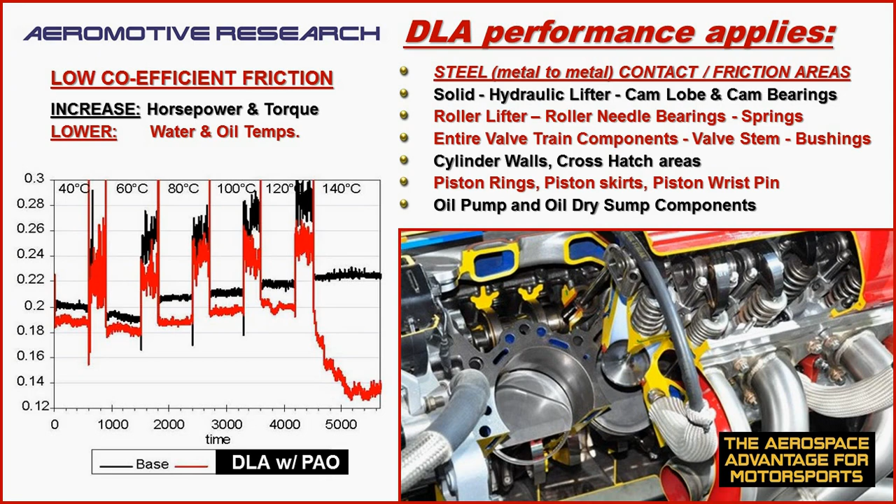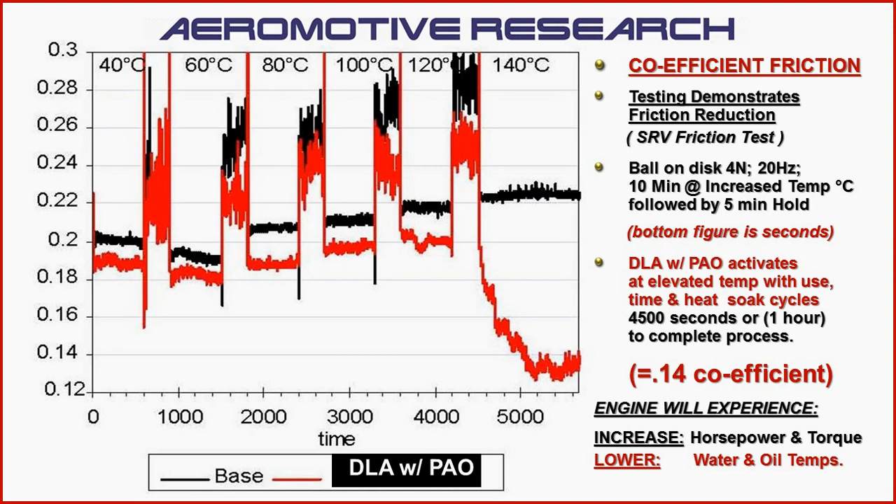Protecting the valve trains and components, the pistons, the rings, and the oil pump. It will help reduce the coefficient of friction to give you a little more horsepower and torque and lower your water and oil temperatures. Even though a 20W50, it still has a lower coefficient of friction with the additive package that's in there. The engine will be protected during those cold start requirements, with increased horsepower and torque.

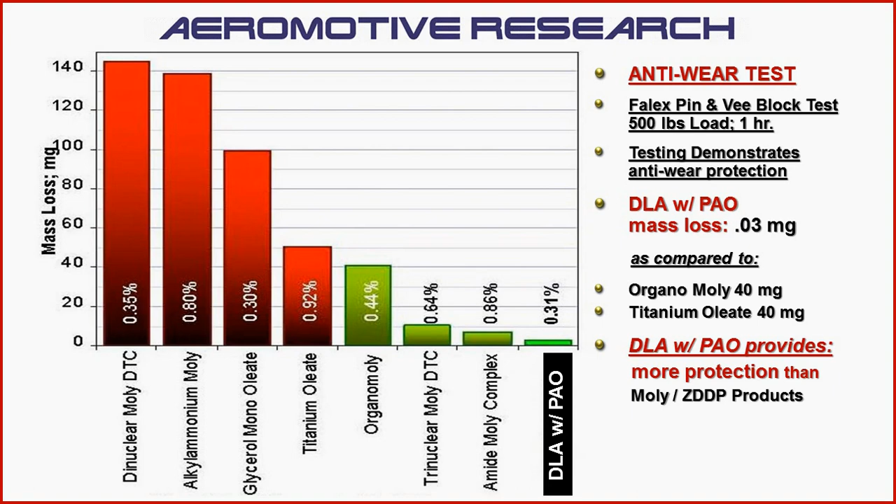Something that's very important in the 20W50 application is the anti-wear capability. The diamond-like additives with the PAO will have less loss of metal in the metal-to-metal contacts. In other words, it will perform better than products with moly in them.

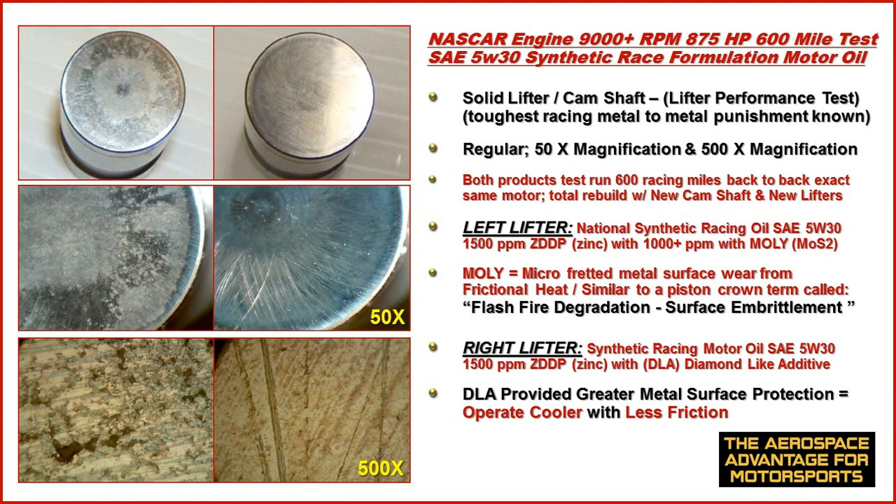Here is another showing of that lifter. You see the lifter surfaces after 600 miles and 9,000 RPMs. On the left is the high zinc motor oil with the moly, and on the right is the high zinc motor oil with the diamond-like additives.

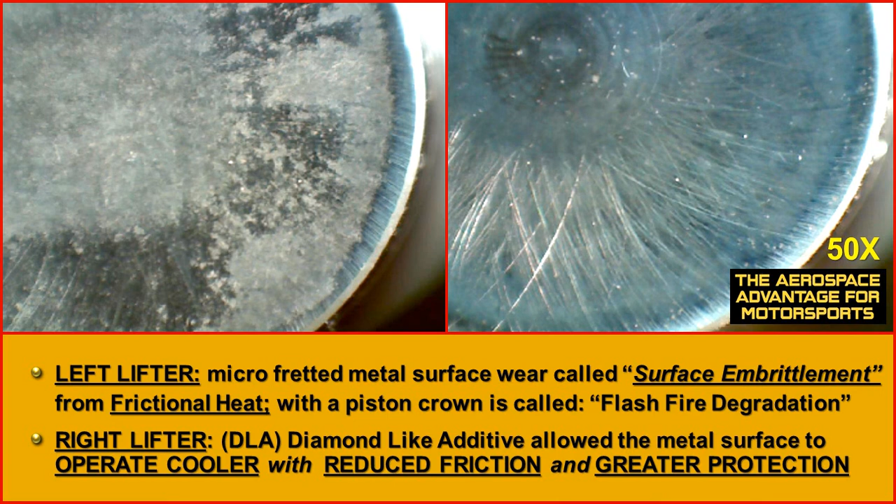On the left, at 50 times magnification, you see the micro-fretting of the metal surface. It's called surface embrittlement. Say, Clayton, that's a fancy word. I know, just reverse it. Embrittlement of the surface. In other words, from the heat and the friction, it just started breaking the metal off. If this was a piston crown, it'd be called flash fire degradation. In other words, it's degrading from the heat that's taking place.

But you see, the right lifter has the diamond-like additives. It allows the metal surface to operate cooler with reduced friction and greater protection. Now again, on a 20W50, you say, hey, it's thicker oil, it should protect. Yes, until you get to the point where the actual metal to metal is coming together and you don't have a lot of that thick oil film being a cushion. This is where the additive's nano-dimensional performance comes into the metal and works better.

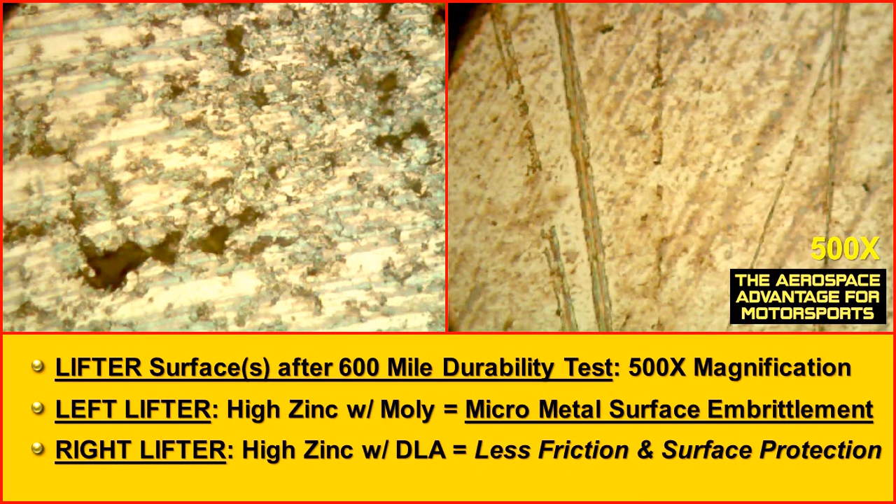At 500 times magnification, after the 600-mile durability test, the left lifter with the high zinc and the moly had micro metal surface embrittlement. The right lifter, high zinc with diamond-like additive, less friction, greater surface protection. Truly the aerospace advantage for motorsports.

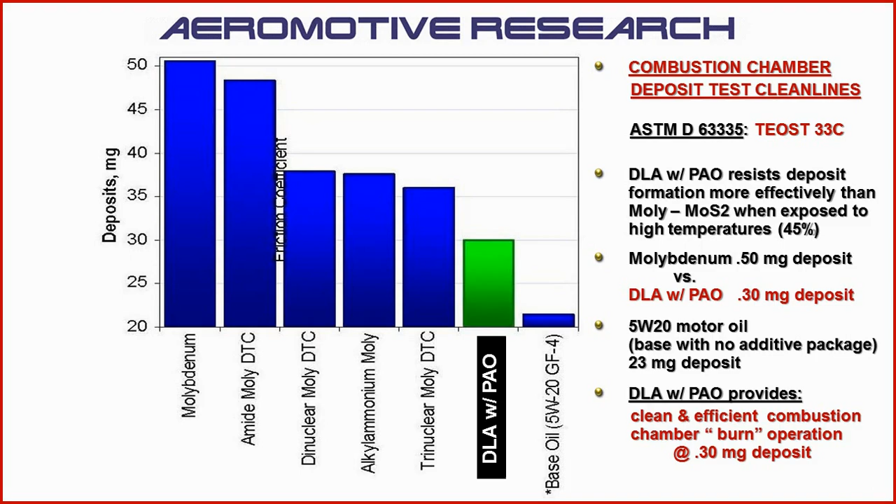Another area that's very important even with 20W50 oil is what we call combustion chamber deposit cleanliness. A lot of people use moly in their oils, which is a less expensive way to try to achieve something, but it has close to double the amount of contamination as compared to diamond-like additives with a PAO synthetic, even in your 20W50 oil.

Now, DLA with a PAO synthetic or synthetic blend will provide combustion deposit cleanliness. You see, combustion cleanliness is important for long-term high RPM needs. If the racing or high-performance additive is not balanced or formulated correctly, especially when zinc is over-treated within the motor oil, hey, let's put an additive of zinc. Well, more ain't better, all right? The unburned contaminants will create piston hotspots and cause spark detonation.

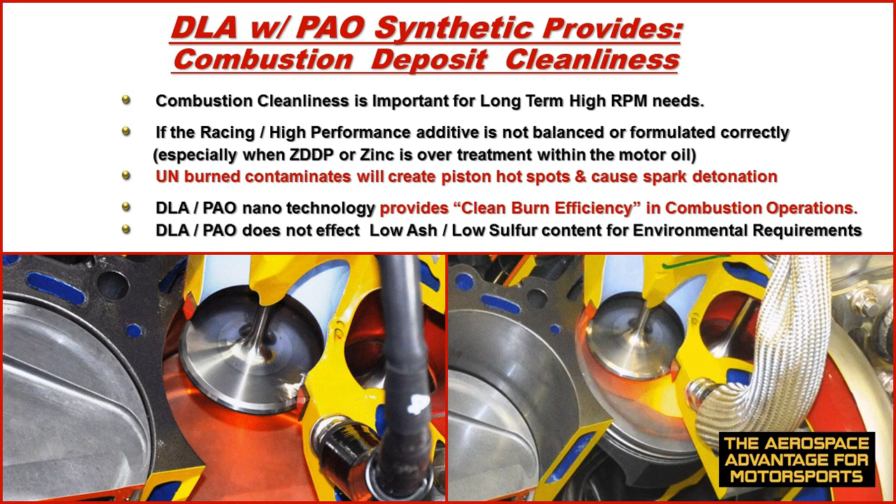You see, the DLA with the PAO, even in the blended oil, the nanotechnology provides clean burn efficiency in combustion operations. The DLA with the PAO does not affect low ash, low sulfur content for environmental requirements. Now, when you put these two situations together, diamond-like additives for the lower friction and diamond-like additives for the anti-wear durability, it will help with the metal-to-metal contact areas and all the components within the engine.

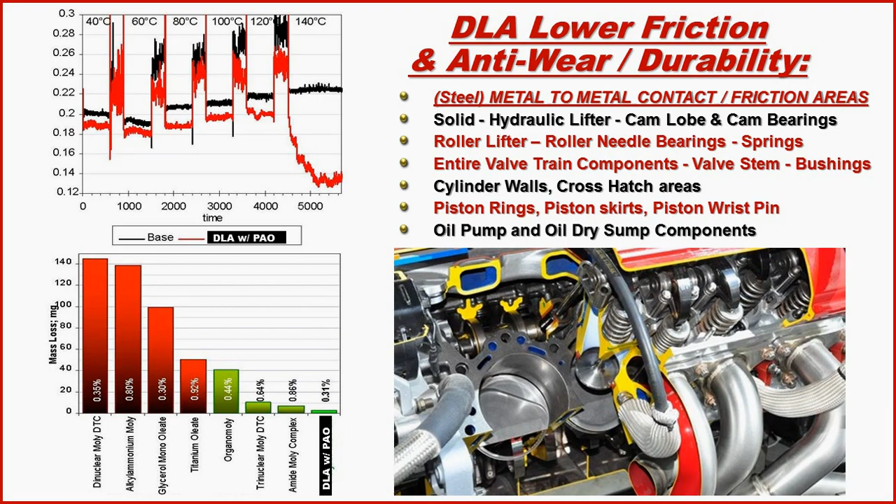All right. The final rebuild cost was only the standard R&R with your rings, bearings, and springs, etc. But you should always replace components at the end of their service life when they look like that's it.